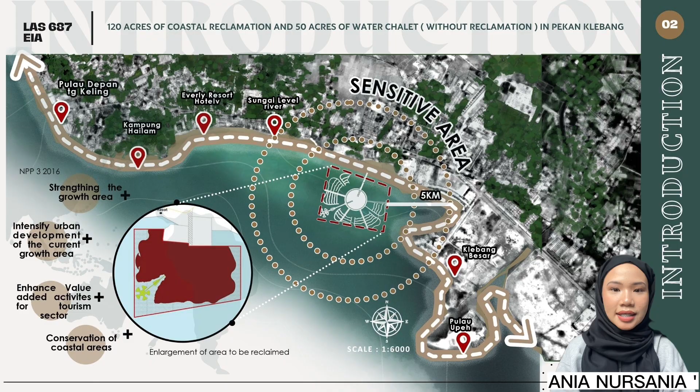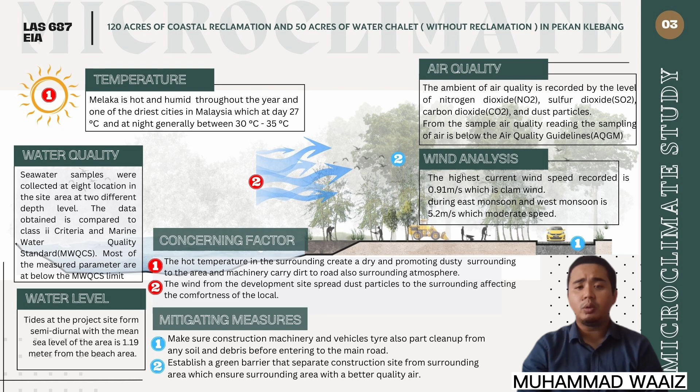The concerning factors regarding the microclimate of the site are, first, the hot temperature in the surrounding creates a dry and dusty surrounding in the area. The second is the wind from the development site spreads dust particles to the surroundings, affecting the comfort and also the health of the local people.

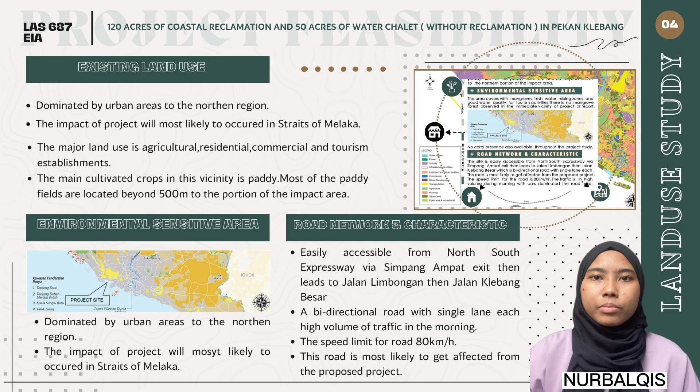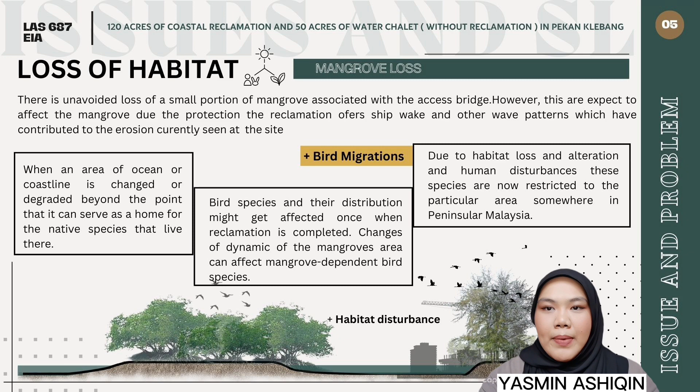5 km from the boundary of the proposed site has been identified as the impact area. Major land uses of this area are usually agricultural, residential, commercial, and tourism, with paddy as the main agriculture. Pulau Upeh, situated 3 km from the site, is identified as an environmentally sensitive area due to turtle landing. This project had to cause a loss of habitat, specifically mangrove loss. It can be seen that there is unavoided loss of a small portion of mangrove associated with the access bridge. However, these are expected to affect the mangrove due to protection, the reclamation offers ship wake and other wave patterns which have contributed to the erosion currently seen at the site.

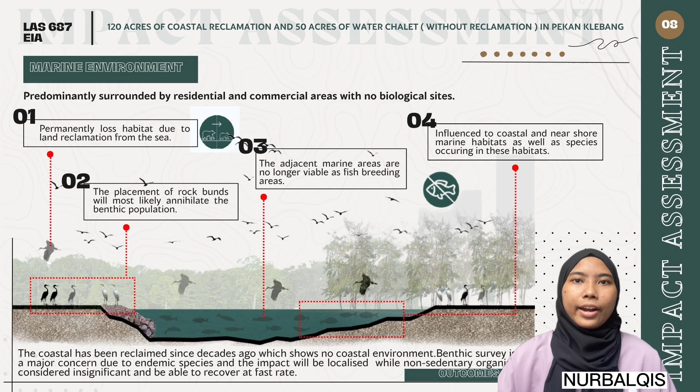Thus, the marine environment permanently loses habitat due to land reclamation and is no longer viable as fish breeding areas. The project influences coastal and nearshore marine and related habitats. Rock bunds also annihilate benthic populations. In order to tackle the issue, the benthic survey is a major concern where the impact will be localized, while non-sedentary organisms are considered insignificant and able to recover fast. The project area is also surrounded by residential and commercial areas with no biological sites.

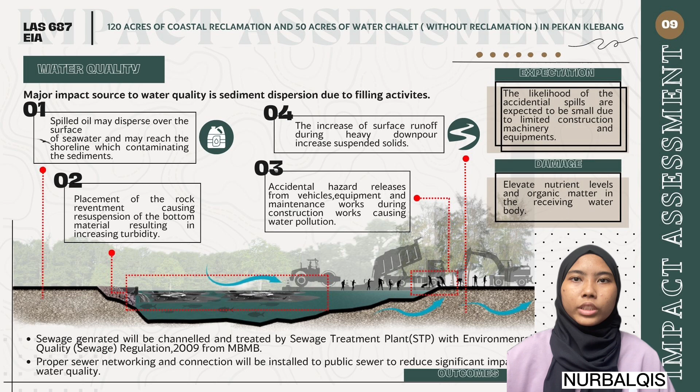And lastly, the major impact to water quality is sediment dispersion due to filling activities and oil spills on the surface water from accidental hazards of vehicles and equipment, and placement of rock bunds, causing increasing turbidity and surface runoff. This will elevate nutrient levels and organic matter in the water body. However, it is expected to be small, where the sewage treatment plant will be channeled and treated by MBMB, and also proper sewer networking and connection is installed to reduce significant impact on water quality.

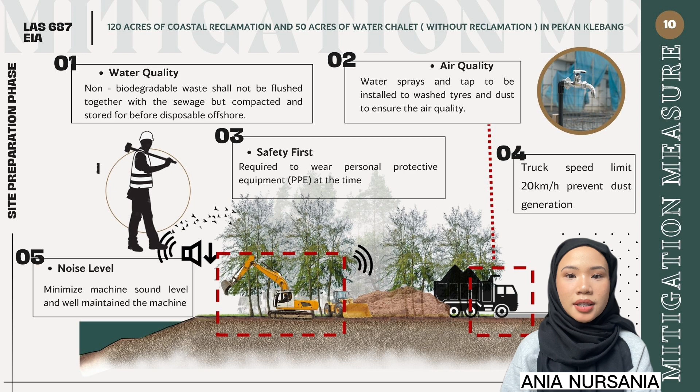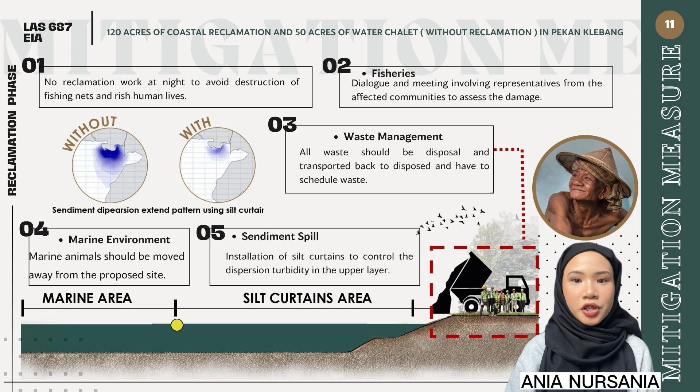From the maps, it could tell without silt curtain, the sediment dispersion extension pattern is bigger and larger. Lastly, during the operation and construction phase, 30% of the workers should be from the local community through skills training programs for them. Open burning is prohibited.

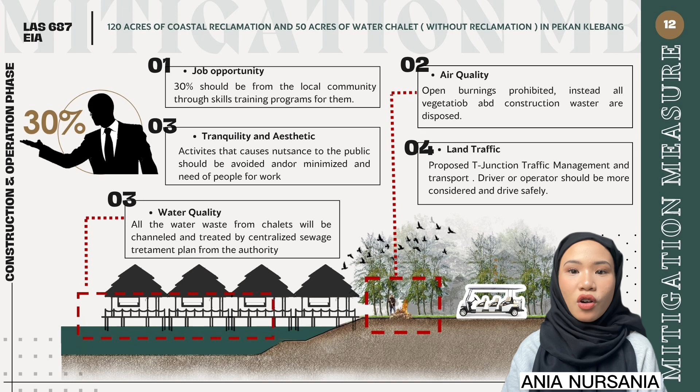All the vegetation and construction waste needs to be disposed. Lastly, to propose a T-junction traffic management and transport, and the driver or the operator should be more considerate and drive safely. Mitigation measures occur in the other reference case, which is proposed development of the integrated petroleum hub and maritime industrial park, including reclamation at Tanjung Piai, Johor, Malaysia.

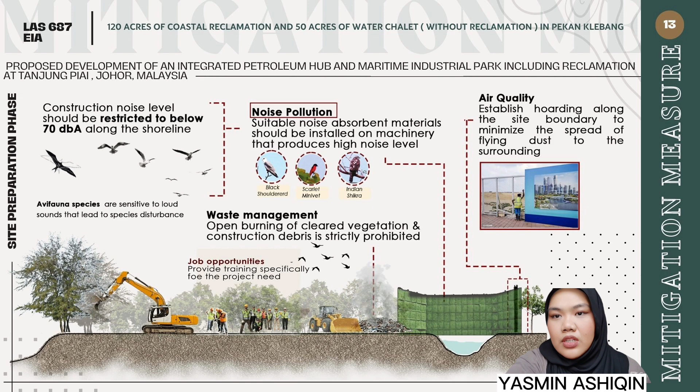For the first phase, this project has prepared a few mitigation measures where construction hoarding needs to be installed to minimize flying dust on site. Secondly, suitable noise absorbent should be installed on machinery that produce high noise level. This is because the avifauna bird species are sensitive to noise, which leads to noise disturbance to them. Last but not least, open burning that involves construction debris is strictly prohibited in order to protect the air quality on site.

During reclamation phase, scheduled production rate has been proposed for this project. This action will minimize the sediment dispersal. Silt curtain also will be installed to maintain the water quality. Last but not least, during construction phase, this phase has involved few mitigation, which proposed a retention pond will be equipped with oil separation and interception to prevent diffuse pollution from surface runoff or accident spillage.

Other than that, speed limit shall be imposed on all vehicles entering and leaving the site to prevent dust turbulence. And lastly, lighting needs to be installed for working purposes and needs to be far from shorelines.

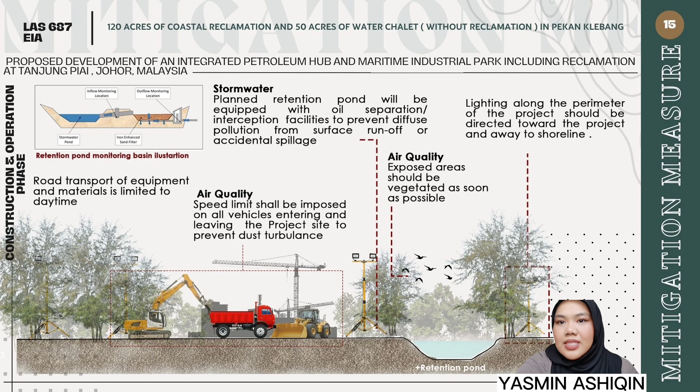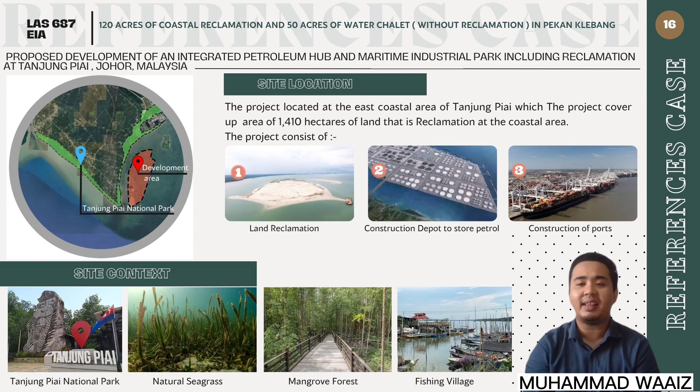The reference case that we studied for our study site is proposed development of an integrated petroleum hub and maritime industrial park, including reclamation at Tanjung Piai, Johor, Malaysia. The project is located at the east coastal area of Tanjung Piai, and the project covers an area of 1,410 hectares of land. There are many concerning factors regarding the development in the reference case site, but we choose 3 main factors, the first is coastal erosion.

Due to the increase of ship route activity in the area, the increased ship wakes cause constant wave crash to the coastline. The potential industrial discharge to the water body can affect water quality, marine life, and mangrove forests.

The next factor is the disrupting of ecosystem of wildlife and marine life due to the development area located at a sensitive area, which is at Tanjung Piai National Park, and seagrass area that could endanger the marine life, such as dugong, which is considered a protected species. It can also create potential water pollution before and after the project that affects the marine life and its surroundings.

The third factor is affecting the fishermen activities in the area, as the project reduces the fishing zone that affects the main income of local fishermen, and food supply in the area will be decreasing as the project affects the concentration of fish in the sea.

For mitigating measures of the development to tackle the three concerning factors, first for the coastal erosion is by designing offshore wave breakers that weaken waves from ship wakes that impact the coastline and rehabilitate more area for mangrove planting. Next, for the disrupting of ecosystem of wildlife and marine life, the mitigation is through regulating frequent water quality checks to ensure the quality is suitable for marine life and ensure discharge of waste is avoided and discharge is done properly.

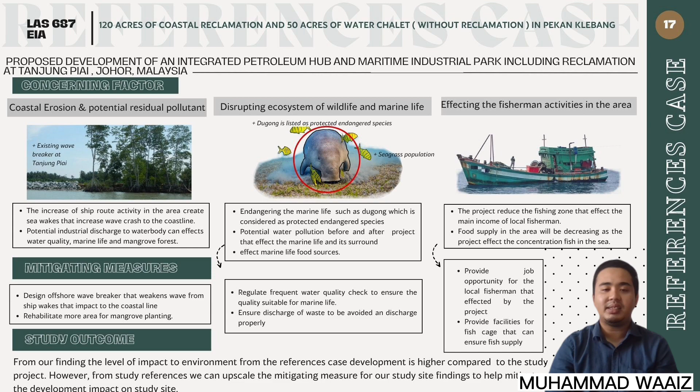Lastly, for the factor of affecting the fishermen activities, it is by providing job opportunities for the local fishermen affected by the project and providing facilities for fish cages that ensure fish supply to the fishermen. For the study outcome of the reference case development project, we find that the level of impact to the environment from the reference case development is higher compared to our study project.

To conclude, there are 3 new mitigation measures that we would like to state. First, due to elevated TSS in runoff which can affect aquatic species, it is to use erosion control measures, timing, and avoid spawning and incubating periods of the affected fish and aquatic life. The erosion control and fencing sediment downstream of active construction areas, this mitigation measure will be made in construction phase.

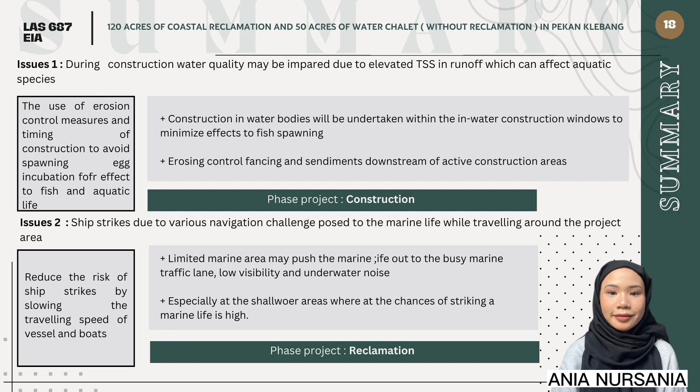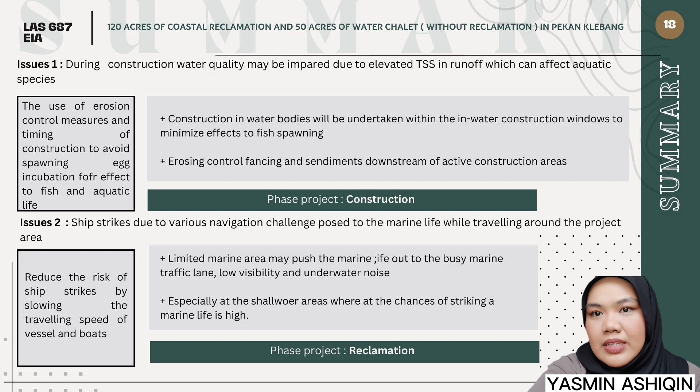Second mitigation measure would be to reduce the risk of ship strikes by slowing the travelling speed of vessels and boats, which will be carried out during reclamation phase, where its limited marine area may push the marine life out to the busy marine traffic lane, low visibility and underwater noise.

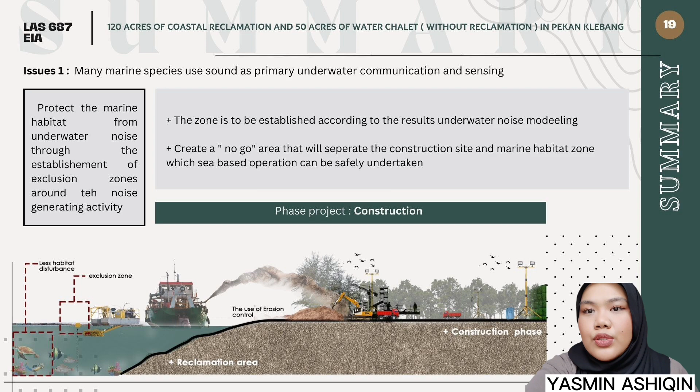And lastly, protect the marine habitat from underwater noise through the establishment of exclusion zones around the noise generating activity, which will be carried out during construction phase, where it will be established according to the result of underwater noise modeling.